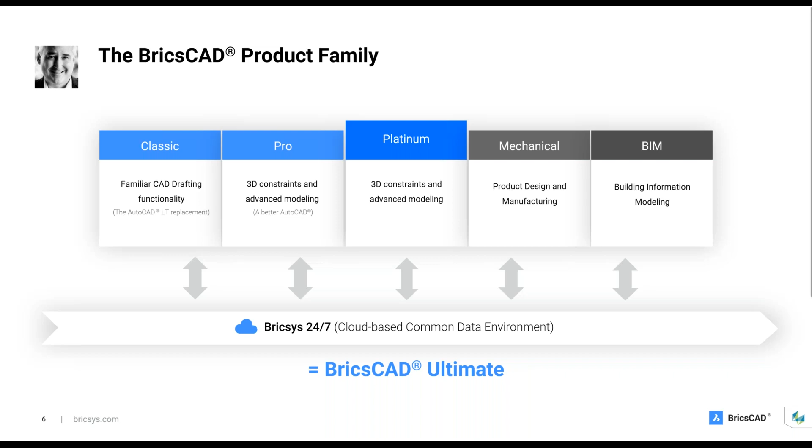Now, why BricsCAD? Well, there are several things that we will bring home to you today. Number one, BricsCAD is eminently affordable. I'll show you that next. It is highly UI, user interface, and user experience compatible with Autodesk's AutoCAD. Therefore, it is very easy for AutoCAD users to learn BricsCAD.

BricsCAD is flexible. We offer many license types that our competitors no longer offer. And after the demonstration by Julie, Robert will tell you a lot more about how easy it is to deploy and manage BricsCAD in your company. Now let's do that quick pricing comparison.

BricsCAD is available as a perpetual license. Let's do the first calculation based on the cost of BricsCAD Pro as a perpetual license. Buy it once, use it as long as your computer will support it. The maintenance makes sure that you're up to date with BricsCAD all the time, that you have the latest major versions, that you have access to priority product support, and also access to Bricsys 24/7.

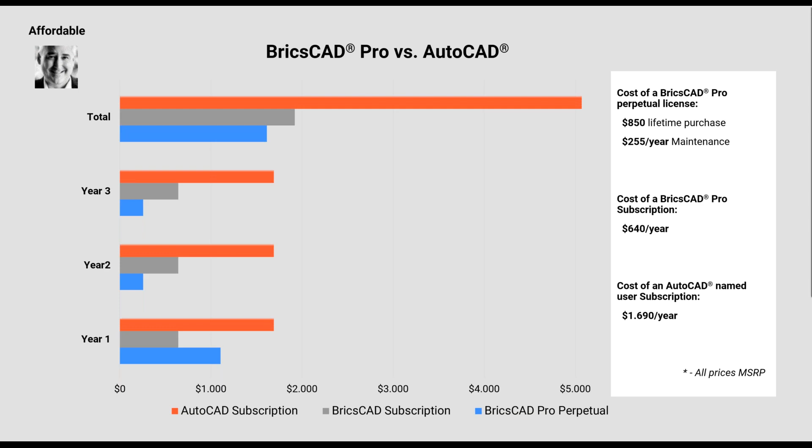Next, let's take a look at subscription, because some customers see value in subscribing to BricsCAD or renting BricsCAD instead of owning it. You can see the cost again. $640 USD per year is the suggested retail price, and you can see that total across 3 years. Now, let's look at AutoCAD subscription based on, again, Autodesk's manufacturer suggested retail price.

From this chart, we can draw 3 very fast conclusions. First, you can buy BricsCAD Perpetual for less than the cost of 1 year of AutoCAD subscription. Next, BricsCAD maintenance is about 15% the cost of a year of AutoCAD subscription. So for that minor fee, year over year, you can always keep your BricsCAD license up to date with the latest features, functions, and workflows from Bricsys. And finally, over 3 years, BricsCAD still costs less than a year of AutoCAD subscription. A very important thing for you to consider in these times.

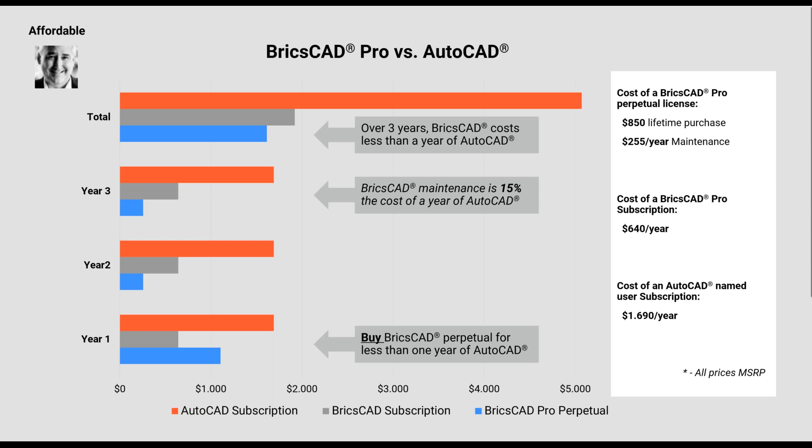Now, I talked for a moment about licensing. We like to say, your license, your way, your choice from Bricsys, BricsCAD. The most flexible licensing model that's available in the industry today. First, we still offer perpetual licenses. Maintenance is an option for you. We do this because our customers tell us that this is a very important licensing option. They want to own their software. Of course, if you want to subscribe, we make it easy and very, very affordable.

Also, a single BricsCAD license supports any language in any location. You don't need to ask our permission to use your BricsCAD license in a different locale. And we won't charge you extra for the privilege either. And finally, network, multi-user, and volume licenses round out our offerings. You can choose to mix and match these licenses as it makes sense for your business.

Now back to compatibility, a quick story. Robert does a lot of sessions in companies that he calls lunch and learn. We bring in some food for lunch, and all of the participants bring their laptop computers. They install BricsCAD and work with it over the hour. They enjoy their lunch, go back to their desks, and are able to start using BricsCAD immediately. By the end of the afternoon, they're proficient with the product.

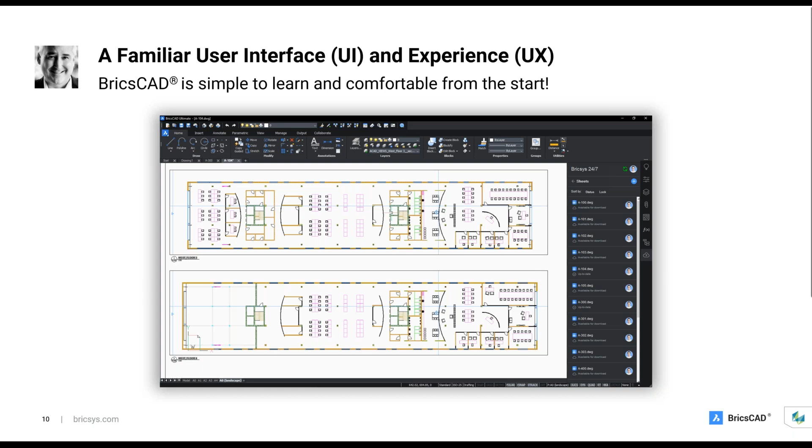All right, you see my screen. So today I'll be showing you just how familiar and similar BricsCAD is to AutoCAD, coming from a user's point of view. I'll also point out a few things that are different from AutoCAD in a good way.

Let's start with the UI. Of course, we have the ribbon, many toolbars up top, the panel here, command line, as well as the status bar. And of course, you can change what you see on your screen.

For those AutoCAD users that like the menu bar, you can have the menu bar. If you like toolbars, you can have all the toolbars. If there are other panels that you want to see, you can display them or not. And for those of you that like to work with a clean screen, you can have that clean screen.

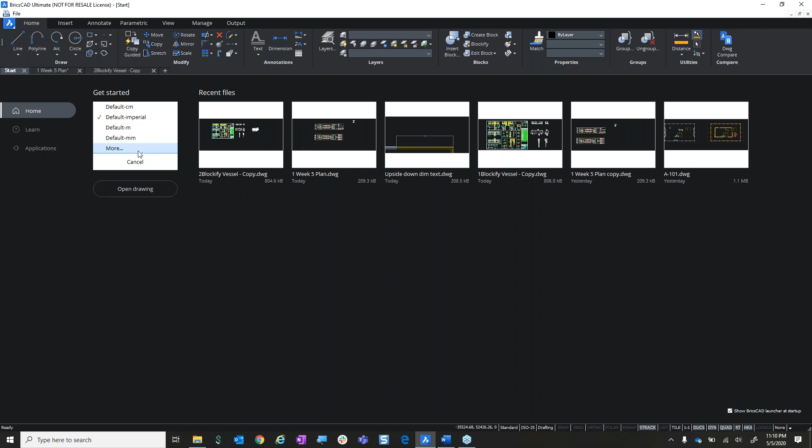The Start tab is where you create your new drawings from a template, whether it's a BricsCAD standard template or your own. As you know, save your DWG as a DWT to create your templates, or open existing drawings from here, and notice these are DWGs.

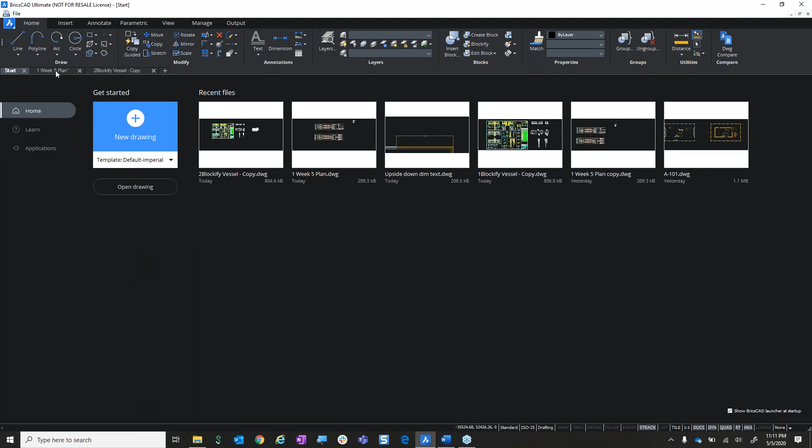The list of your recent files is here, along with the path of where it's located. Access learning tutorials and sample files from the Learn tab, and view third-party applications from the Applications tab. Any open drawings are displayed as tabs at the top of the window. All familiar, all similar to AutoCAD.

Now I'm ready to put some finishing touches on this plan, and then I'll create a PDF. First thing to do is add some dimensions. Of course, I can use the dimension menu from the menu bar, the annotate tab in the ribbon, and the dimensions toolbar. I can start dimensioning just like you do.

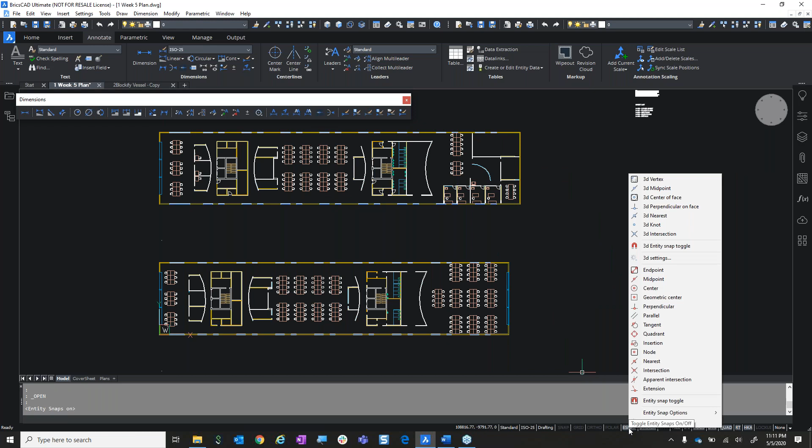Turn on my snaps, continue on. But I see there's something amiss with my dimension style. My text is very minuscule, so I do have some other dimension styles in my drawing. I just don't know what is in those styles, so I need to look at the dim styles.

If my memory serves me right, I can just type DDIM at the command line, and that brings me into the Drawing Explorer. This is one of those tools that is different from AutoCAD, and that's a good thing. Here we can see we're right in the Dimension Styles area of the Drawing Explorer, and over here on the right are all of the settings for this dimension style.

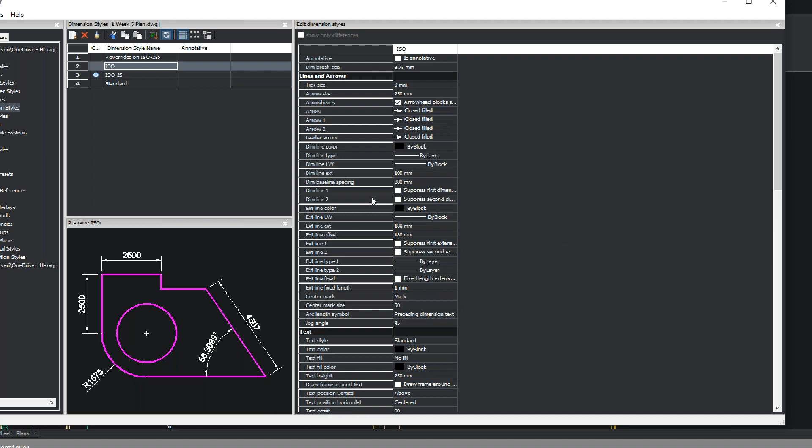We can take a look and see that yes, the arrow is very small, as is the text. Let's look at this style, and we can see that's a little bigger, so that might work, but I still don't know all of what's different between these two styles.

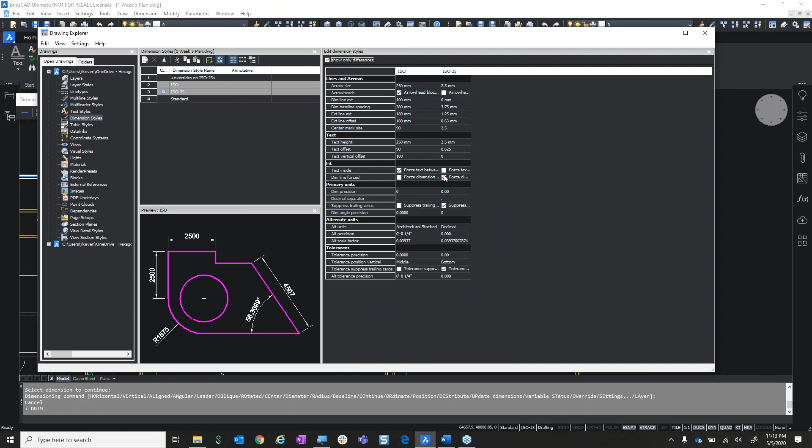Now, BricsCAD makes that very easy for me to see by highlighting those differences in blue. So that's very helpful, but that's still a lot of information to look at. So BricsCAD makes it even easier by showing me only the differences between these two styles. By looking at that, I can say that I need to be using this dimension style.

So we'll go back to the drawing and update that just like you do in AutoCAD, and that looks much better. Before I continue though, I need to check the layer that I'm working on because I think I'm on the wrong layer, and I am.

I'm on layer 0. I should be working on my dimension layer. I don't even see that in my drawing. I'll go back to the Drawing Explorer to copy some layers from another drawing.

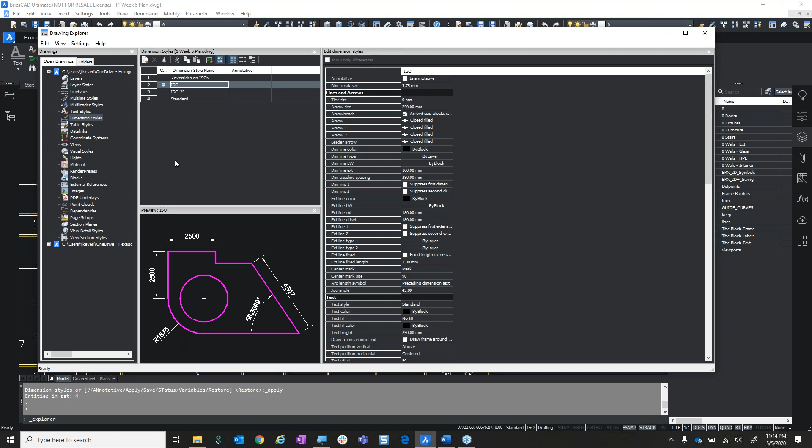The Drawing Explorer lets us explore other drawings, and this is where BricsCAD manages all of the style definitions. So we can go to the layer states or the layers area here. I need these two layers in my current drawing.

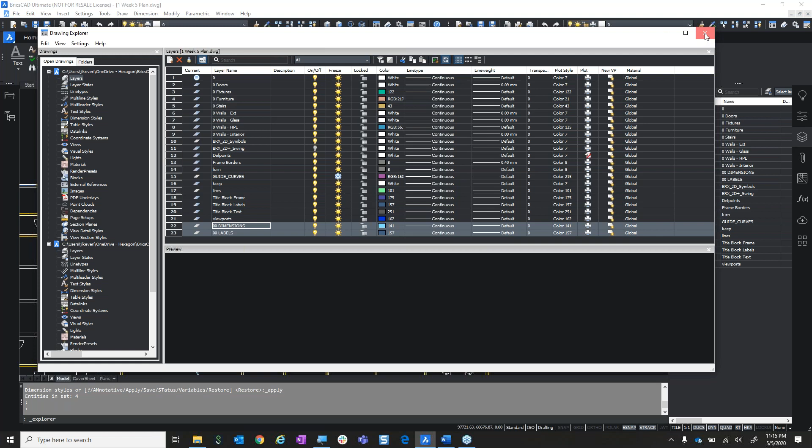I could use the copy and paste buttons up here, but instead I'll just drag and drop those layers into my current drawing. We see they're now here in my Drawing Explorer, as well as over in my layers panel. And now we can update the layer that these dimensions are on, just like you do in AutoCAD.

Or I can do it a little bit differently by just hovering over that dimension, which brings up the quad menu, which is different. And from the quad menu, I can simply change the layer there too. So very quick and easy to do.

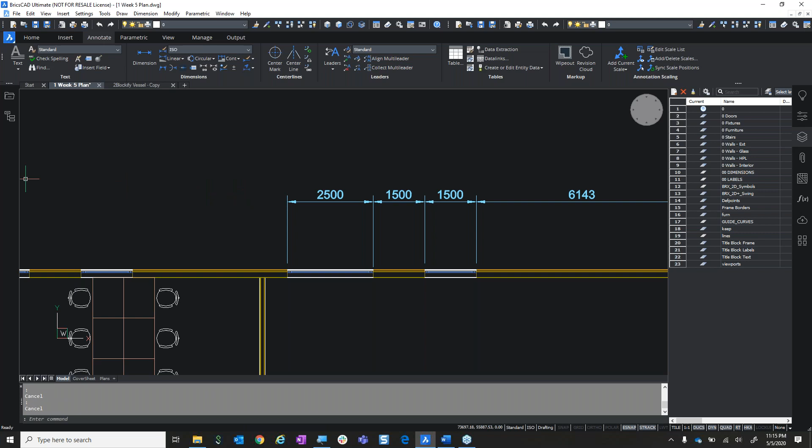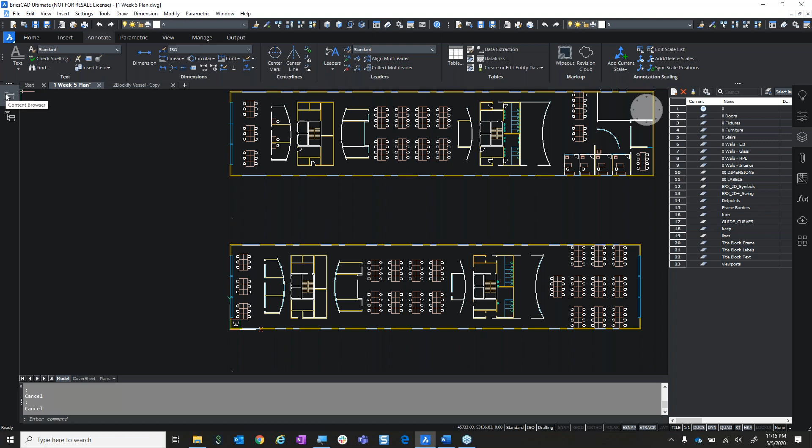Something else that I need to do is add a label for these plans, a title. Again, I know that I have a block that I'd like to reuse from another drawing. I could, again, go back to the Drawing Explorer, but instead, I'll use the content browser. Just like in AutoCAD, sometimes there's more ways than one to do the same thing.

Now, the content browser is a panel that lets you view the contents of other drawings, as well as dig down to see different blocks that are in that drawing. And this is the label that I want to use. So I'll just drag and drop that in to my drawing.

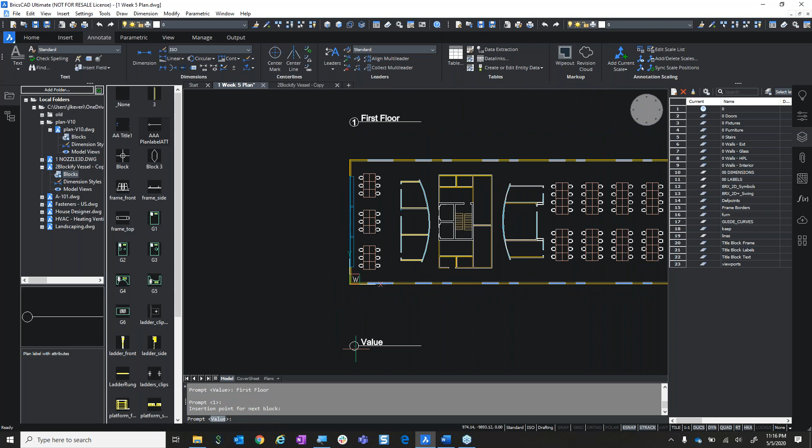I'll place it twice, and I can see that there are attributes with this block. So we'll fill that information in, just like I do in AutoCAD. So my labels are done.

The next step is to add paper space layouts. Creating paper space layouts in BricsCAD is very similar to how you do it in AutoCAD, simply clicking the little plus sign, or we can right-click on a layout tab, create them, delete them, move them, copy them, just like you would in AutoCAD. And of course, if I want to type it, just type layout and I have those same familiar options.

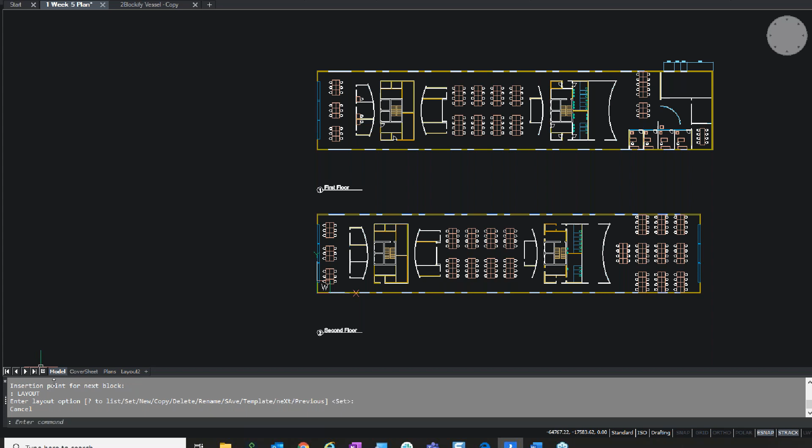Another tool that's different in BricsCAD is this little icon here to the left of model. That's our layout manager. This is a quick way to manage your layouts. I can create them, delete them, change the order. I can also filter or search.

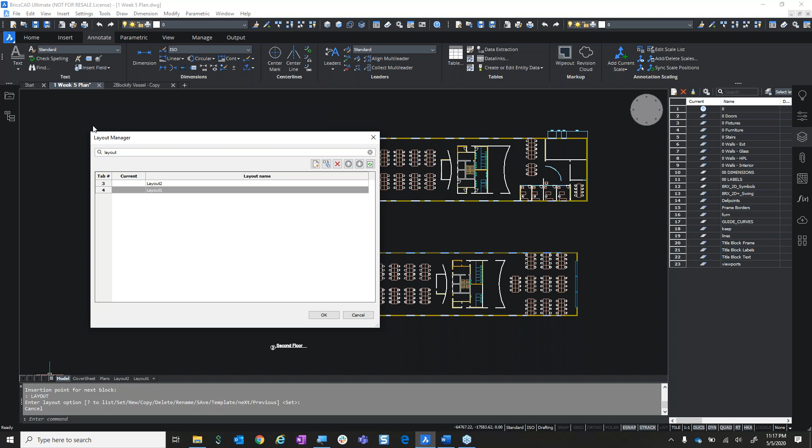Also, when I'm in the layout manager, if I just double click on that layout, it takes me directly to that layout tab. Just like in AutoCAD, when a layout's created, one viewport is created. And just like in AutoCAD, I can VP lock that down from the status bar as well.

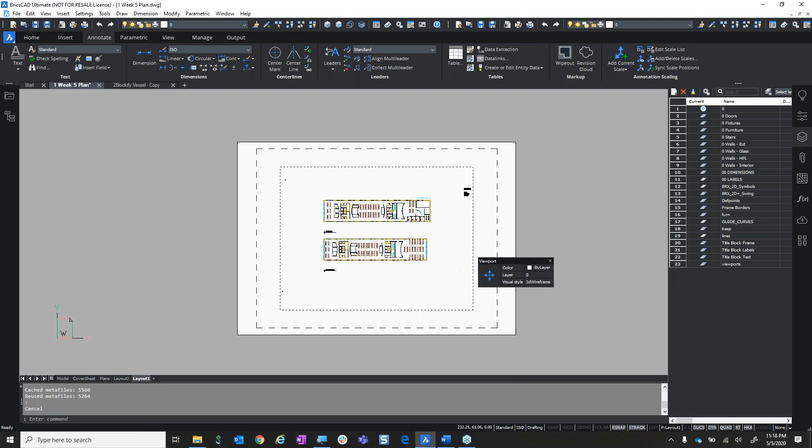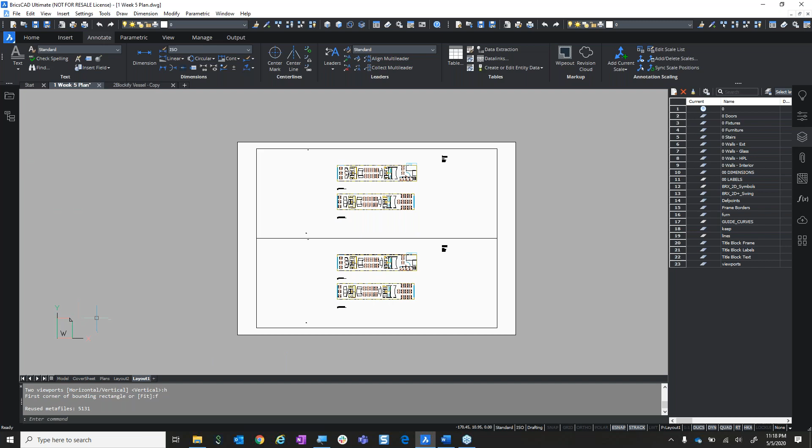You control the viewport, so if you don't like that one, again, just type in viewports, and that's done. Of course, you can use the menus from the ribbon, from the pull downs, or also from the toolbars. So my layouts are set.

Let's see, we've got a couple here. I've got a plan view. I have the beginning of a cover sheet, but I don't have a title block for my cover sheet. So again, we'll go back to the content browser and drag and drop my title block in.

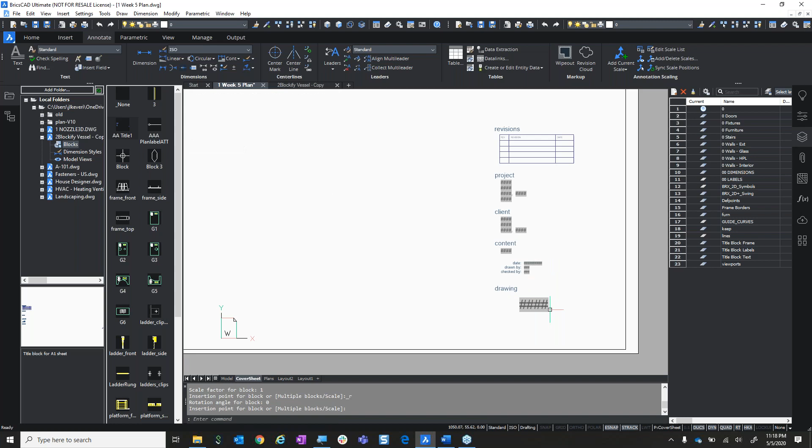I see there are more attributes there, so let me fill in a few of those, again just like I would do in AutoCAD. Think you get the idea. It's just the same. And there are those attributes.

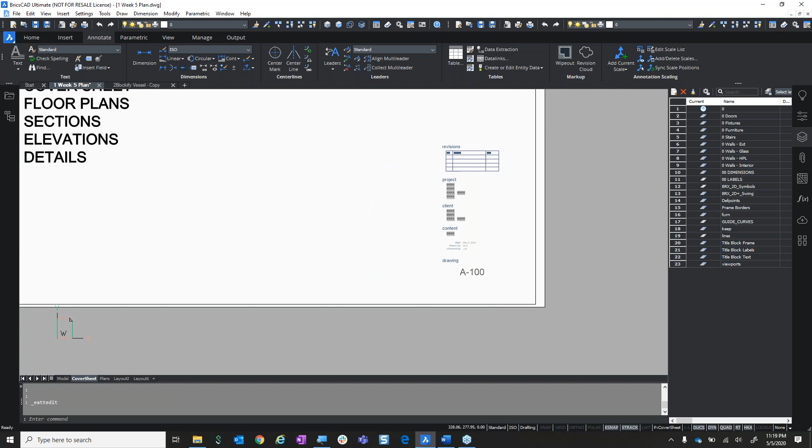Now, dragging and dropping those blocks from the content browser is quick and easy. I know I'll use those blocks often, so I want to add them to my tool palette. And that's very easy to do. We'll go back to Drawing Explorer, to the drawing that they're located.

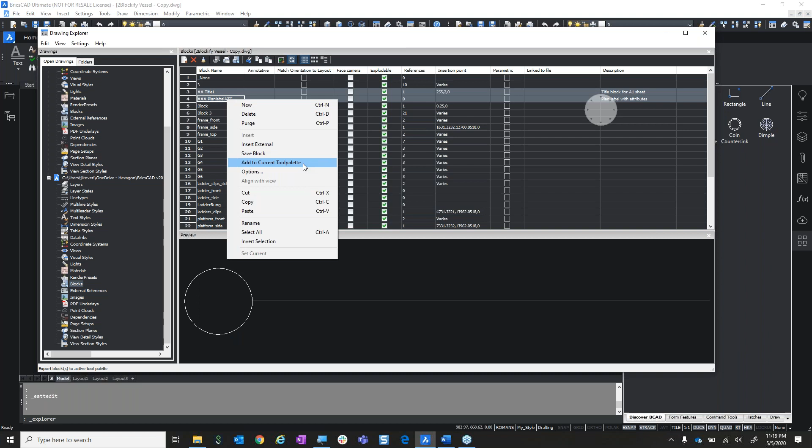Here are the two blocks that I want, and with just the click of one button, I can add them to my current palette. Here they are, ready to be drag and dropped into my drawing. Can't be any easier than that.

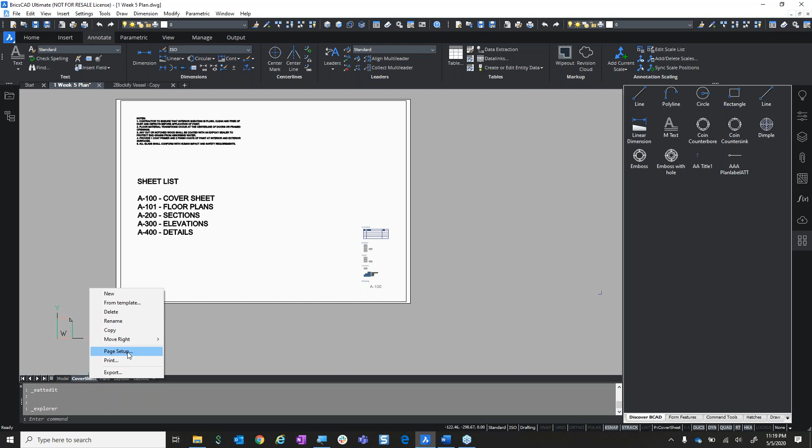All right, at this point, I'm ready to print this to a PDF. So of course, we're going to go to Page Setup. Very familiar, looks just like it does in AutoCAD.

I can choose my printer, my plotter, my pen tables, all my orientations. Everything is the same. My paper size. I can have a preview of what this might look like. That looks pretty good. So that's good.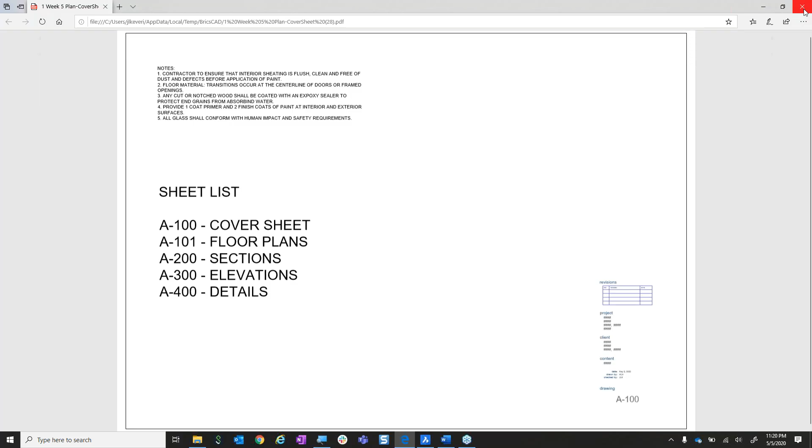Now we just need to publish. Again, this all looks very familiar. If you have sheet lists, you can use those.

We're going to print the layouts to a PDF. Here are all my PDF options. That all looks good, so we'll go ahead and create the PDF.

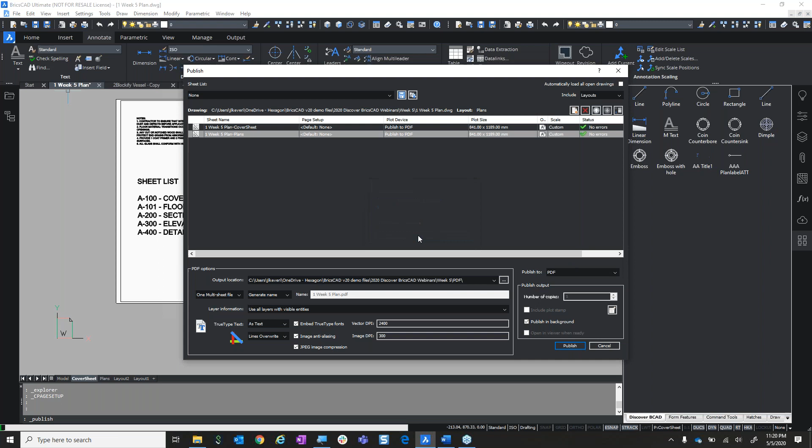So what I've shown you so far in BricsCAD is very familiar and very similar to AutoCAD. And remember, BricsCAD is built on the native DWG file format.

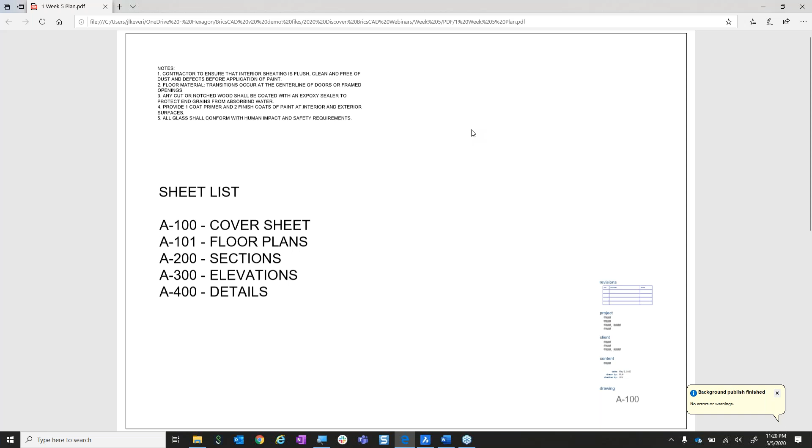So here's my first sheet. Here's my second sheet. Now, looking at this, I realize there are still some things I need to clean up on my drawing. So let me go back to the model, and right in here, I need to copy this chair to a few more locations.

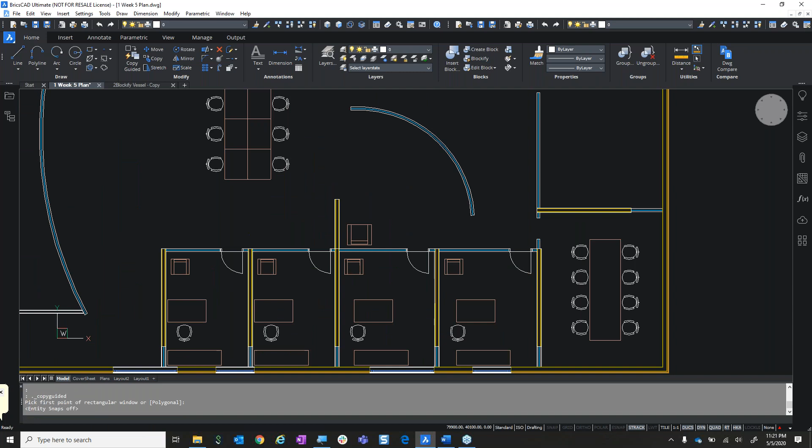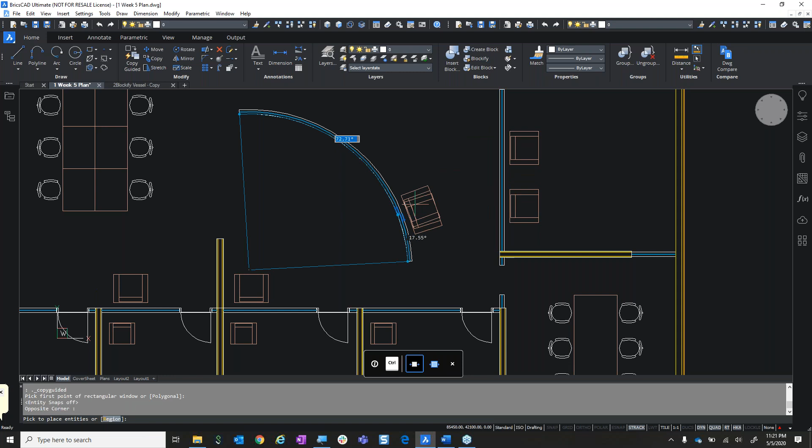Instead of using the regular copy command, I'm going to use copy guided. This is one of the AI tools that does so much more than copy. When I make my selection, anything completely within my selection window gets copied, and anything that crosses my window becomes my alignment curves. So when I move my cursor towards the matching geometry, you see how the chair just snaps into place. It's also smart enough to ignore geometry that doesn't match, and it recognizes that geometry even if it's at a different angle or on a curve. That's pretty sweet.

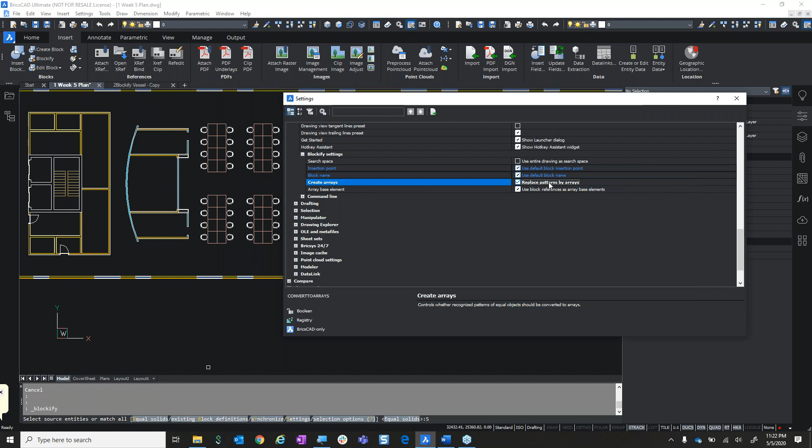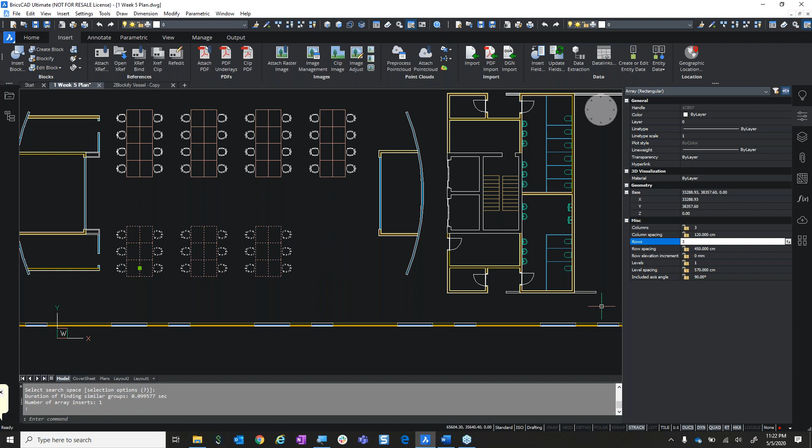I've noticed that these chairs and desks are just entities. At one point, they were blocks and arrays, similar to what I have up here. So I'd like these to once again be blocks, and I can do that with the blockify command. I'll not only make them a block, but also make sure they're replacing the patterns with arrays. Simply select what I want to be those blocks and arrays, and that quick, BricsCAD has created those blocks and arrays just as if I had made them myself. I can edit that array, but BricsCAD did it so much faster.

Now, Blockify and Copy Guided can do so much more than what I've shown you here. We've highlighted these tools in previous webinars, so if you haven't watched those, I'd encourage you to go back and take a look because there's a lot of great tools there.

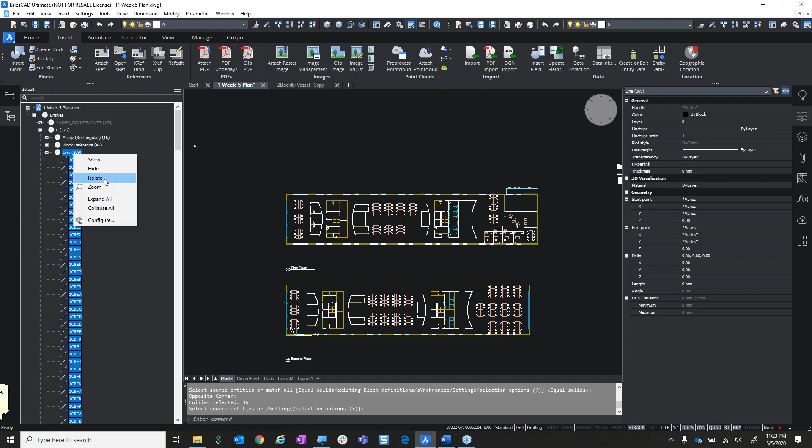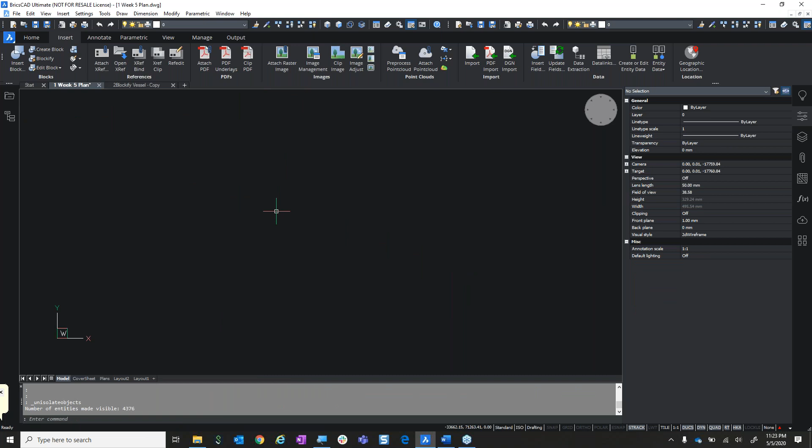One last thing I've noticed is I have a lot of entities on layer 0. So I've opened the structure browser, which is an interactive view of entities in my model. We can see that I have 309 lines, and the structure browser can also be used as an analysis tool. We can take a look at where these lines are, but they look kind of strange. If we look at the properties panel, the length of the line is 0. These are 0 length lines, which I don't want any of, so we'll just delete those. But that makes me wonder, do I have other areas of my drawing with 0 length lines?

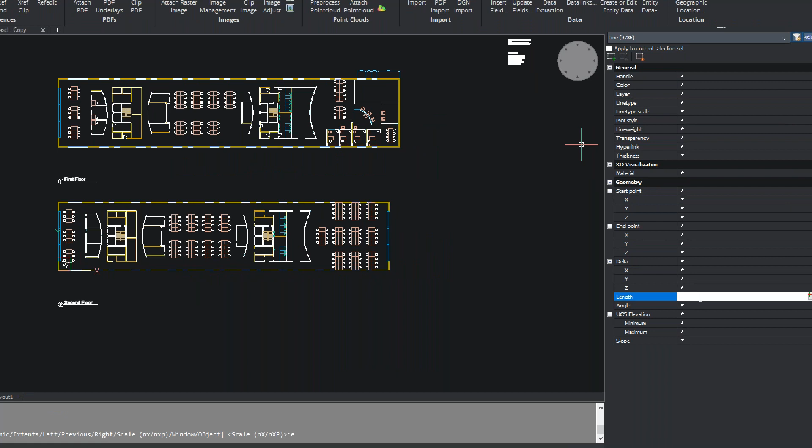So we can go to the properties panel and look at the filter, filtering on different entities and any combination of properties. Again, I'm concerned with that 0 length, and yes, I have more of these 0 length lines. This identifies them for me, and I can go ahead and delete those. This shows how the structure browser and properties panel can be very helpful in analyzing and cleaning up your drawings. This is another difference between BricsCAD and AutoCAD, and again, it's a good thing.

So this was a quick look at how familiar and similar BricsCAD is to AutoCAD from a user's point of view, and also how learnable BricsCAD is. With that, I'll hand it back to Don.

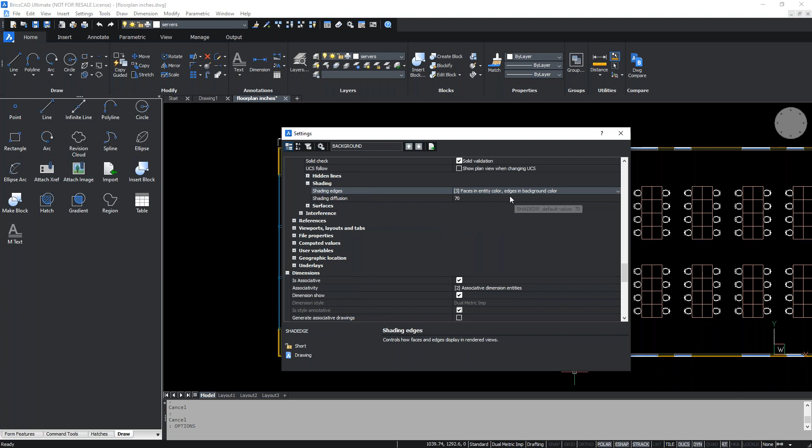Now, what if we had something that was more like a needle in a haystack? I kind of know how to describe what I want to do. I want to change the background color on my model space tab. Well, I don't know what the name of that variable is, so I'll go ahead and type in background. Well, that's hatch background, no, that's not it. Shading edges are right here - edges in background is where it hit there. Text fill, no, background - background color, bingo. So we've got there.

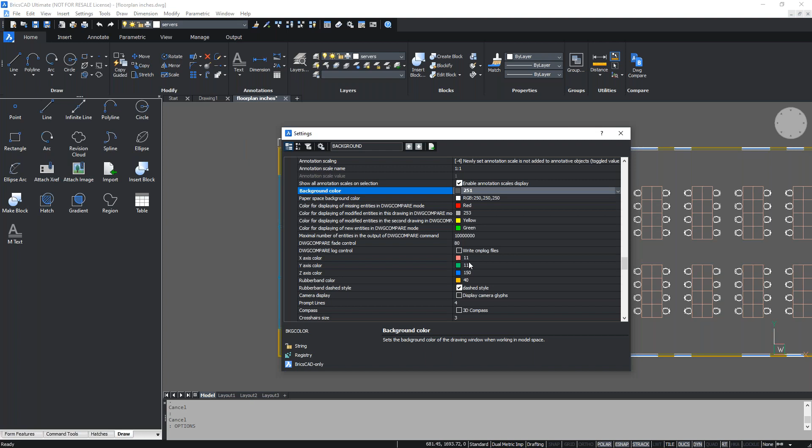So this is allowing us to just step through all of the system variables, whether they're local to the drawing or registry values. There's over 900 of them, and you can see how quickly I'm able to step through them. Now, I'll just change this - I have it black presently, I'll set it to our standard 251 gray interface. Now, what you couldn't see, but I'm going to call out, is that by making a change to that setting, that variable there will be highlighted blue.

Now, as a CAD manager, I can come into a user's computer and I can easily go through settings and scroll down through it. And anytime I see highlighted text that's blue, I know it's something the user has changed. So if I'm ever called over to their machine to figure out where they've gone wrong or where they may have set something inappropriately, this is of great assistance.

So what I did here was just take you through a brief showing of how our settings interface works, which I think is superior to the options command that you find in AutoCAD.

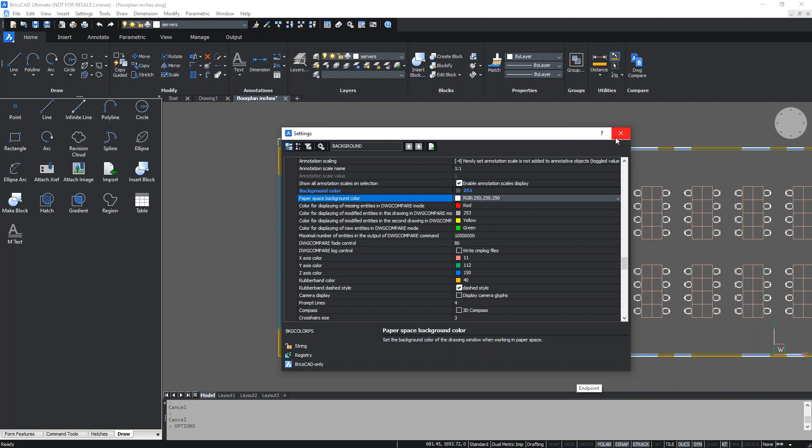Next major area of questions that I certainly get is customization. So we typically think about CUI files, and this is where we think about ribbon tabs or pull down menus like we see here. Later we'll talk about palettes. So how are these things implemented?

Well, I want to show you the customized interface, and I'm going to answer another question that I frequently get, which has to do with command aliases. It turns out that we manage our command aliases in the same customized panel that we use to manage all of our menus, toolbars, and ribbons. So right here we see, we can scroll down alphabetically and see that C means circle. Good enough. But what if in my organization we've standardized on CR means circle?

It's very easy for us to do an add, create an alias CR, and we'll just make that circle. I just typed it, or you could have picked it from the drop-down list, either way. I'll go ahead and acknowledge that with an OK, and we see that the list resorts, I'm brought down here to the CR circle. That's been done.

And now, unbeknownst to you, what actually happened in the background is that the PGP file has been updated and the system has been reinitialized. So you don't have to get out of here and do a reinit. You don't have to restart BricsCAD. Everything is handled on the fly.

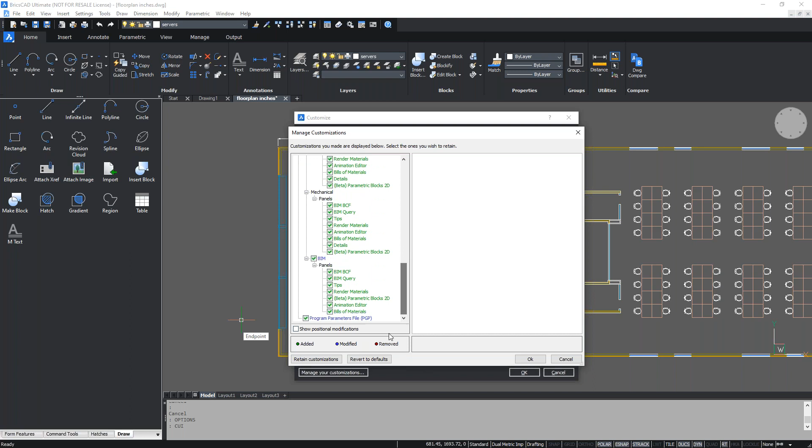And by the way, I'll just click this Manage Your Customizations button down here. This is how we manage user-specific customization. You don't have to worry about things like an offline partial CUI file. We maintain that for you. And one of the things that we maintain for you there has to do with the program parameters file, or PGP file, which we call default PGP.

I'm going to open this dialog box just a bit here so that we can see that. Here we go. You'll see that as we saw in the settings dialog, anything that was changed or modified gets a blue color. So here we're able to tell the last time I touched this file, where the original file came from, and where the modified default PGP file has been set. So it's very easy to track this down. No chasing through multiple search paths or any of the things that I've typically had to do in the options screen in AutoCAD. Real simple, real straightforward.

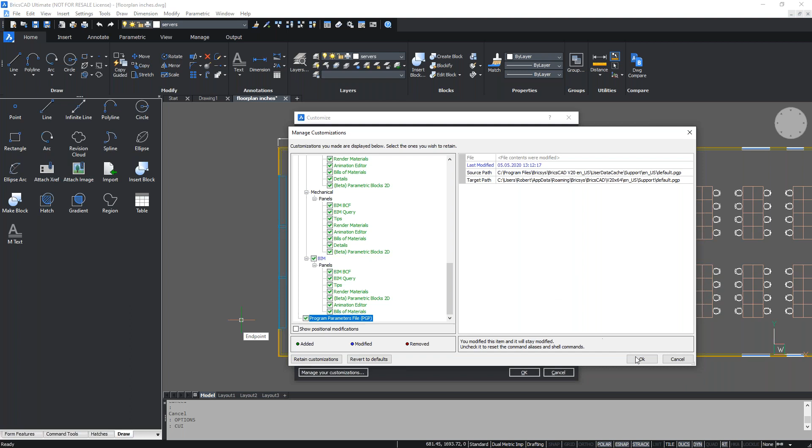Now I'm going to go ahead and dismiss this and say OK here. And right now our CR command would work for circle just the same as C would. Everything has been done there for us.

Next thing I want to take a look at is the idea of bringing over custom palette content. Now, this is something that a lot of companies do, typically for things like block interfaces as a very common usage scenario. So I just want to walk you through that briefly.

What I've got here is the palette interface already pulled up, and we see that we've got a few palettes here. I'm simply going to right-click somewhere in the palette field. I'm going to go into Customize Palettes. And in here, I'm going to right-click under Available Palettes and perform an import.

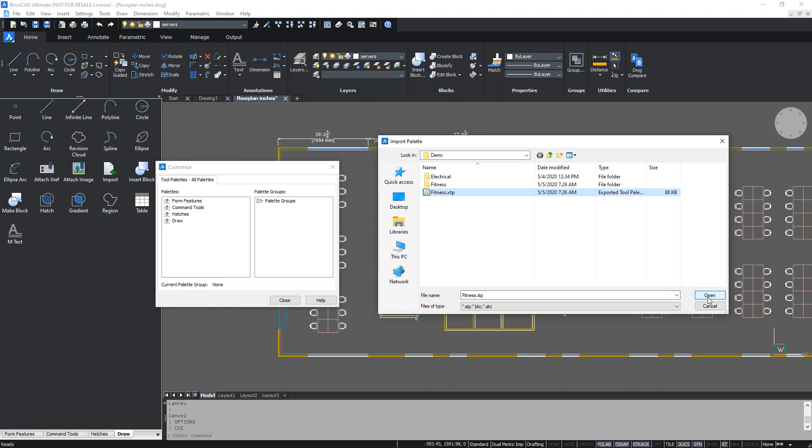Now at this point, I can select any XTP file that's been exported out from AutoCAD. So if I had palettes over there, I simply export them to an XTP, I bring them over into BricsCAD, and so long as the block files are actually on the machine or on the network drive in the place where the palette expects it, everything is going to work just fine. So I'm going to go ahead and open the XTP file right here, and we'll see that that gets updated.

It's present here in the palettes list, so I'll go ahead and close it. I'll bring the focus to that right here, and we can see that everything has in fact been brought over. I'm going to right click on one of these just randomly and show you that the properties were also brought over. So this would be anything like the name of the block, anything with properties like scales or rotation parameters, prompting for rotations turned off here, for example. So all these are parameters that were brought over when the palette was exported and re-imported into BricsCAD.

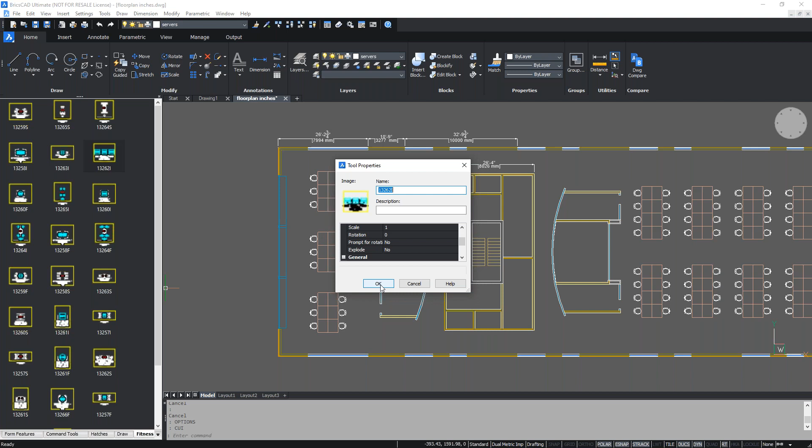So that's all there is to it. Seriously, it's a very straightforward migration. And now that we've got this, it's drag and drop simple. So anybody who's ever used a tool palette is very familiar with this. No problems there. Very straightforward. Let's move to the next item I wanted to show you about, which has to do with Lisp Utilities.

If you've been using AutoCAD for a long time, chances are excellent that you've built up a library of Lisp routines at some point. Here's one, for example, that we used with a client demonstration a few weeks ago, Julie and I did. This has some utilities for reading out areas from drawings in multiple unit systems. It's areas.lsp, and here's the code.

I'm showing you this code in Blade, the Lisp advanced development environment that we have. This is a debugging tool, and it's actually quite superior to VLIDE in my opinion. So anybody who does Lisp coding, I would highly recommend that you give this a look.

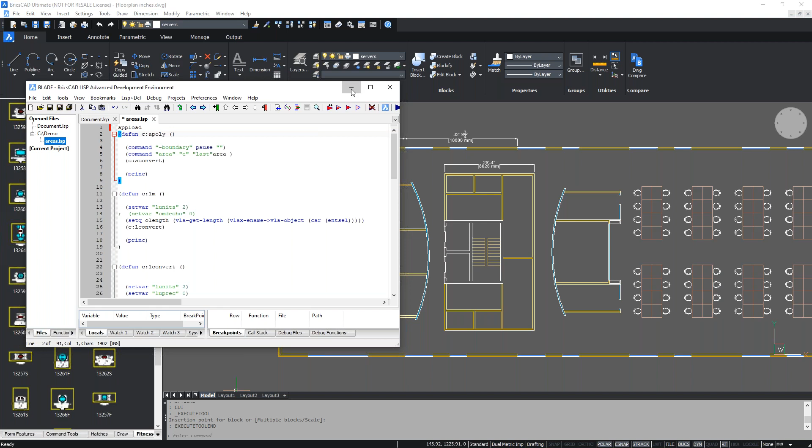Now, for me to bring this in, I'm simply going to the command line and using appload, exactly what you would do in AutoCAD. You can see I've selected the areas.lsp file, loaded it into memory with this checkbox, and with this checkbox I've performed an auto load. This means every time BricsCAD starts from here on out, the areas.lsp will be loaded as well - very much like the startup suite you would use in AutoCAD. Once this is loaded in, the files are available.

If you remember, there was a command called apoly that was on there, and sure enough, that's appended to the command list, and I can now use that. All I do here is just pick an internal point. It evaluates that using a boundary evaluation, and then we can get our alert with a square foot total. So this is a simple utility, but it illustrates how easily we can bring Lisp code in and use it so that you don't have to reinvent the wheel.

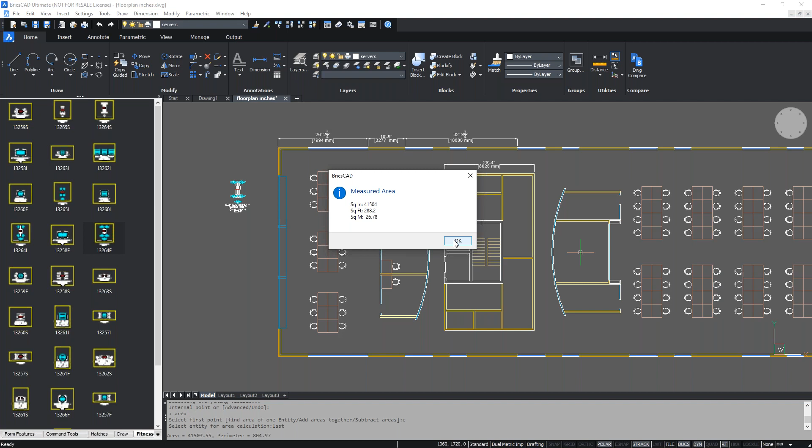Now, we're very aware that these are things that you want to work. The last thing would have to do with output. Julie showed you our ability to support page setups, and the printer and plotting interface should have looked extremely familiar - almost exactly like what you're used to. So what I'm going to do here is go over and get a PDF plotter setup or PC3 file that I built in AutoCAD some while ago.

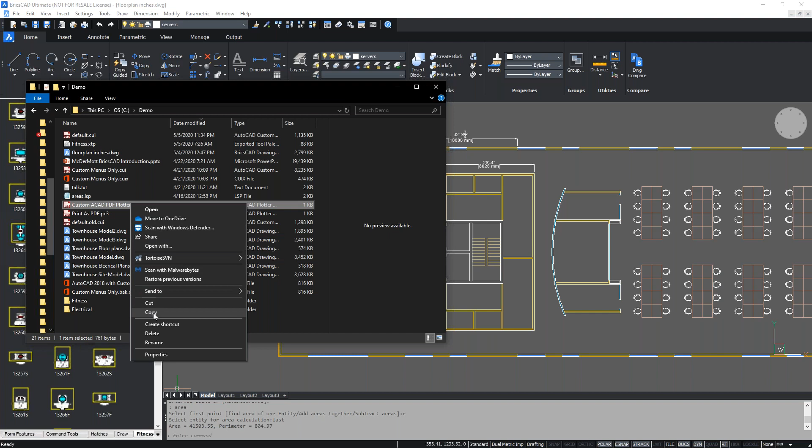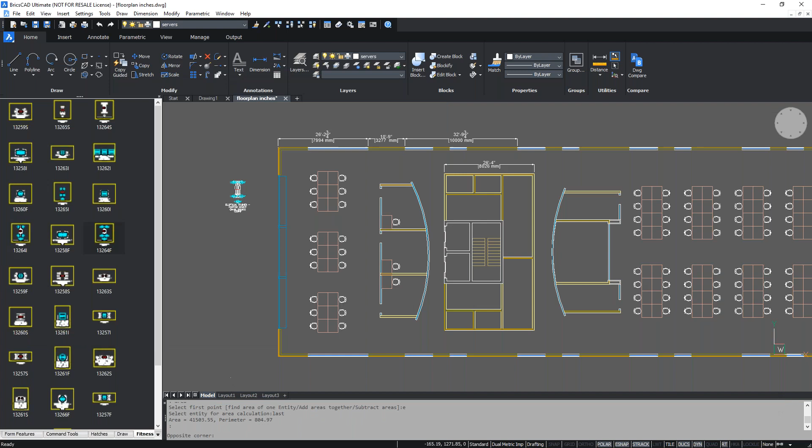I'm going to grab that file and copy it over here into the Plotter Manager folder for BricsCAD. I'll simply paste it in there. There it is - custom ACAD PDF. Remember that, custom ACAD PDF, because we'll see it here in a moment. We'll go ahead into the plot command, and you have to type it correctly. So here's plot, and if we pull this down, we'll see a big, long, nasty list. Well, there it is, so we could print from that.

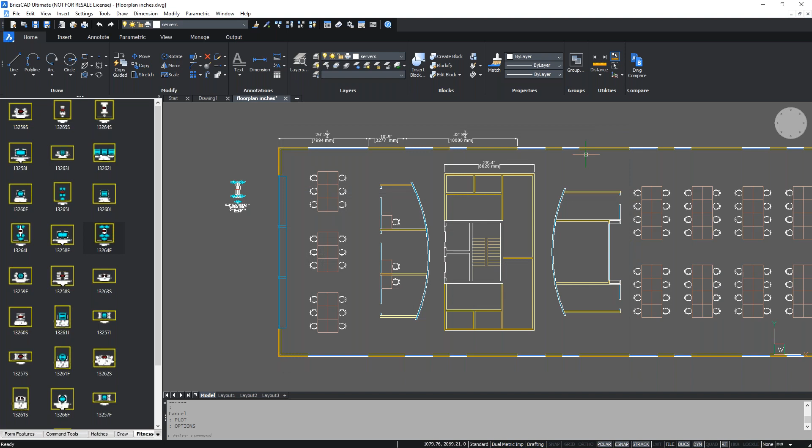Now, I know that somehow there's a way to hide those system printers. So I'm going to go back into our settings, which I can still leave in type options if I want. I can say system printer, hide system printers, and acknowledge that. As soon as I dismiss this dialog box, this variable will be processed and reinitialized - no button to say apply, no exiting BricsCAD to get there. We just simply come back into plot, and we'll see that we can now select this from a nice clean list of PC3 only files.

So obviously we could talk about some more stuff, but what I hope you've seen in this section of the live demo is that we can do a lot of things with BricsCAD that bring over the content you would expect to migrate, but we do it better, right? We have the equivalent functionality of options, but it works better. We have the equivalent functionality of appload, but we've got Blade, which does Lisp interpretation better. So yeah, it's familiar, but it's also better.

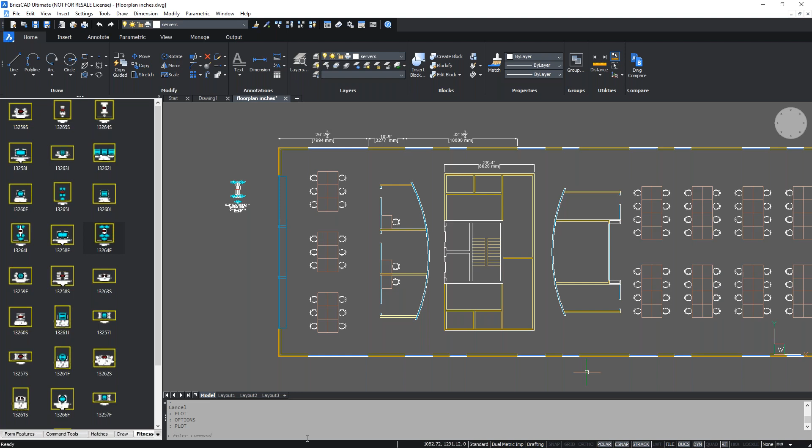What I'm going to do now is go back to my PowerPoint deck and finish off talking about a few more things. Compatibility is key. We understand that you're not going to abandon your current CAD solution and install BricsCAD unless it is highly compatible with everything that you're already doing.

So I'm going to go into a few different areas of compatibility that we want to make sure we stress. The first thing is the data formats themselves. BricsCAD saves DWG files directly. We open DWG files directly. We can open DWGs from far back versions of AutoCAD, way farther back than you have in production. We can save back to those too. We support Save As - all the tools you have used to open and save DWGs are valid here.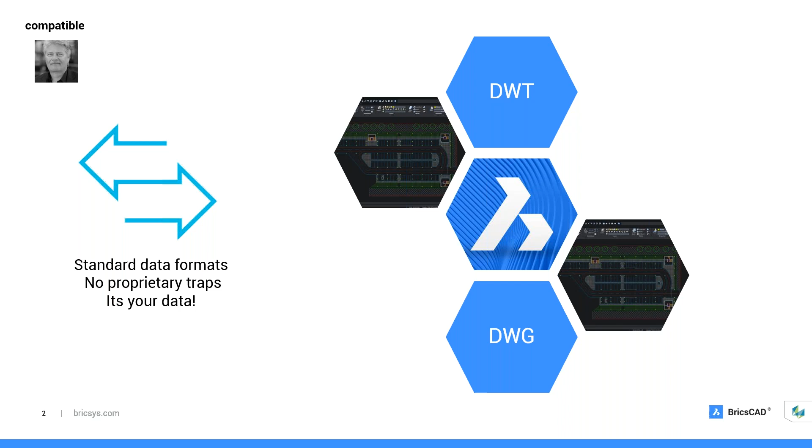You can also save as DWT, just like you do in AutoCAD. So we're using exactly the same files - these are standard data formats. They're not proprietary; they can be used with a universe of third-party software that's out there. Our opinion is that this is your data. It should be in an open standard format so that you can use it the way you feel you should, without ever being in a proprietary data trap.

Compatible from a standpoint of customization. We looked at some of this in the live demo: CUI files for aliases, ribbons, menus. We were able to bring over tool palette content. We were able to run Lisp files directly. We opened sheet sets and template files exactly as you would in your current system. I even brought over a plotter configuration, copied it right into BricsCAD, pulled it up, and it was available to plot right there. So as you can see, you'll be able to bring the assets you already have into BricsCAD rapidly, so that you do not have to recreate the wheel.

And so implementation moves very quickly. That's important. Now, because we are so compatible, we're very, very easy to learn because everything your users are used to is there. Let's talk about it.

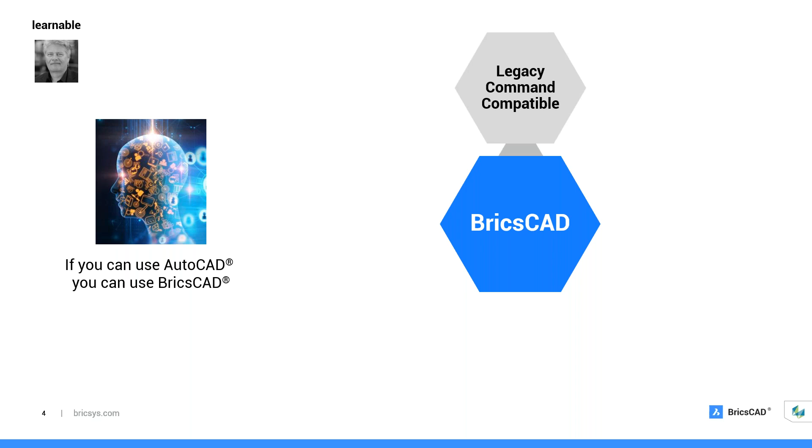Legacy commands: E means erase, M means move, L means line, because we're alias compatible. You could type in PLINE and it will work. You could type in DDATTE and it will work because we use the same legacy command structure.

Our interface is organized in the same way, with workspaces that are laid out in a way that's familiar and optimized. Heidi, who's answering questions right now, is absolutely pivotal in interface design and has made sure that this is going to be straightforward for you to use.

We bring over your custom tools, your palettes, your Lisp routines. Since everything is as it has always been and is located where you would expect, and the workflows are the same, your user's muscle memory takes over and they simply start driving BricsCAD in exactly the same way that they've driven AutoCAD for years and years.

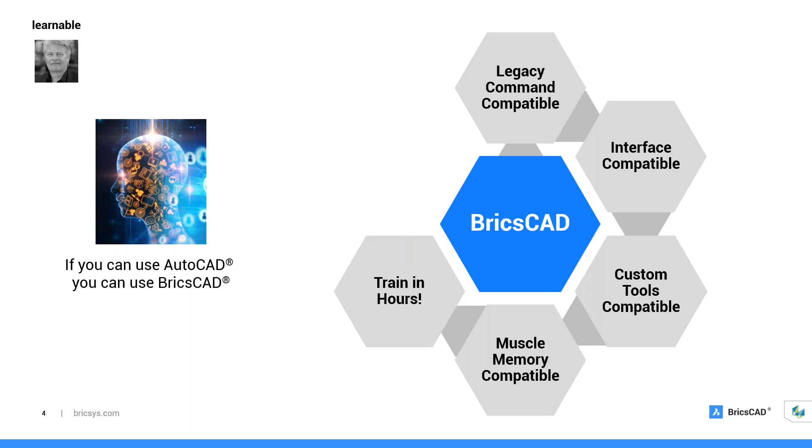This means they train in a matter of hours. And it really is not an exaggeration to say most people really do get it within the first hour of a Lunch and Learn. They really do. And then with a few more hours of familiarization on their own independent time and study, they're proficient. Don't believe me, download BricsCAD for yourself and see it work. And Don will tell you how to do that in just a few moments.

Now, don't just be satisfied, however, with using BricsCAD just as you have your old system, because there's stuff in BricsCAD that's better. Take advantage of that. Use some of our enhanced AI-driven commands to eliminate your repetitive tasks, to speed your workflows.

Take things that used to be 10 minutes to reorganize blocks and turn that into 2 seconds with Blockify. Take things that you used to have to copy around and trim and extend and do construction lines and erase — take that 10-minute ordeal and turn it into a 5-second session with Copy Guided.

These commands are a piece of cake to use. Your learning curve is minutes, not hours. There really is no training to this. If you can use Block, you can use Blockify. If you can use Copy, you can use Copy Guided. And those are just a couple of the AI-enhanced tools that we've talked about in this webinar series.

We've also talked about our spectacular BIMify, propagate, parameterize, intelligent 3D parametric, and automatch capabilities. So BricsCAD is so much more. We're compatible so that you can get to work today, but we're so much more so that you can get that return on investment and become more productive tomorrow.

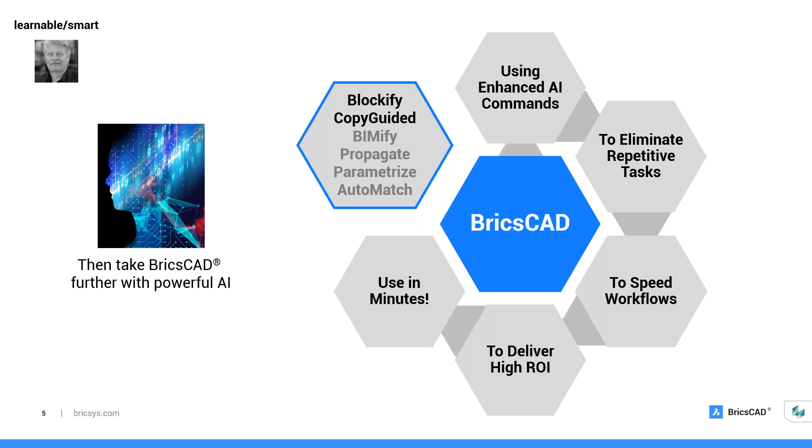Now, from a standpoint of flexibility and deployability, I want to make sure that I re-emphasize a few things that Don said earlier and give you a bit of my CAD management spin on it before we move to wrap up. We still offer perpetual licenses, and we allow you to put maintenance on those perpetual licenses so that you can own BricsCAD, so that you're not held hostage to your rental agreement, and that you can use that software for as long as it makes sense for you and as long as your IT infrastructure can support it.

Now, if you want to be on subscription, you can, or you can mix subscription and perpetual. For example, if you want perpetual licenses for your permanent users, get those. But if you want to staff up for a few months, you could do that with subscription offerings, say for summer students or for a big project that may only go on for a year. It's your call, really, it's your business. Our licensing should support your requirements, and we do that, and we do it very affordably.

As Don mentioned, you can use any language version of BricsCAD you want. You can use BricsCAD from whatever location you happen to sit in, and there's no upcharge for that privilege.

So sometimes we say one license for planet Earth, and we really do mean that. We still support network multi-user licensing. Some people call this floating licensing or concurrent licensing, whatever you want to call it. We still support it. This is not true with the industry leader that's phasing that out at this point.